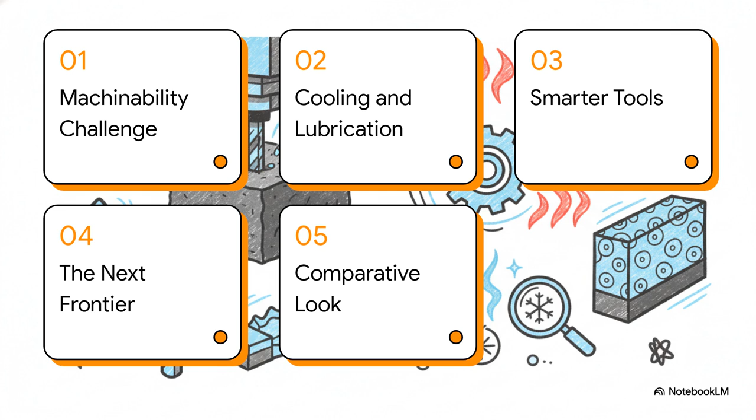All right, let's kick things off with Section 1, the Machinability Challenge. Because before we can get into any of the really cool solutions, we need to have a solid grasp on the fundamental problem we're trying to solve here. This really is the million-dollar question, isn't it? The materials used in aerospace or in high-performance engines are designed to be incredibly strong and heat-resistant, which is awesome for their final application, but it makes them an absolute nightmare to machine.

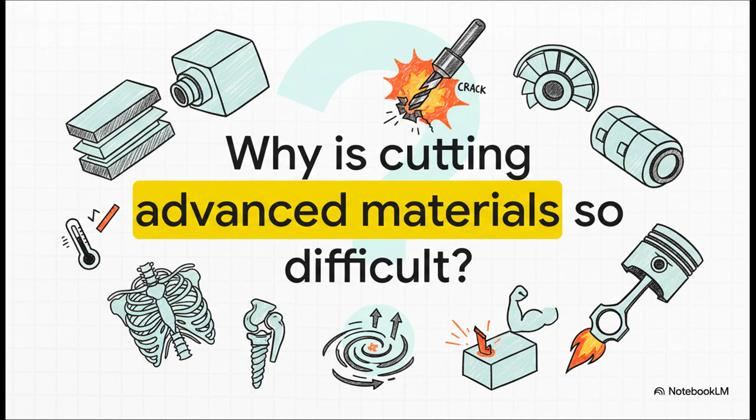They don't just sit there, they fight back, generating just immense heat and pressure that can literally destroy a cutting tool in seconds. And that brings us to this core concept of machinability. It's not just about if you can cut a material, but how easily and how well you can do it. The best way to think of it is like a scorecard with three main criteria.

First, tool wear. How long does your cutting tool actually survive? Second, surface quality. How smooth and perfect is the final part? And third, energy consumption. How much power did you have to pump in to get the job done? These three metrics, they're the key to everything we're about to talk about.

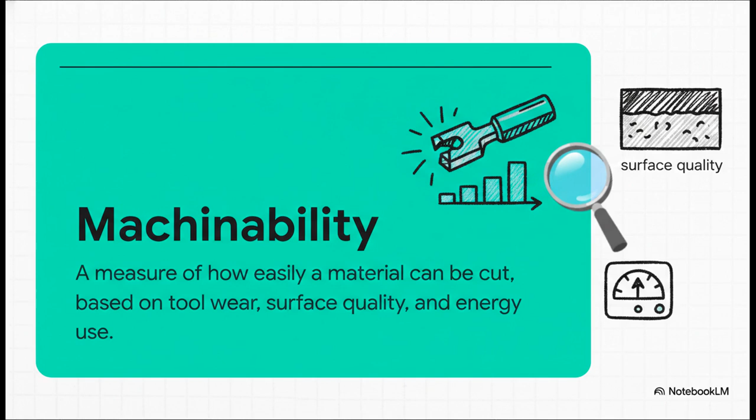You see, the number one enemy in all of this, it's heat. So figuring out how to manage the insane temperatures and the intense friction right at the cutting point is really the first and most fundamental strategy for improving machinability.

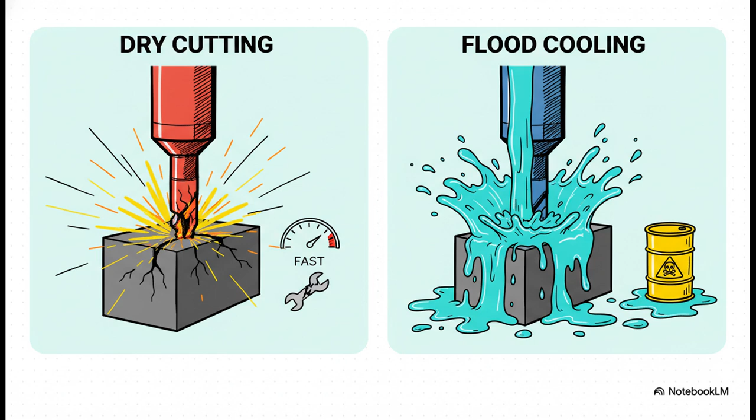For a long time, you basically had two choices. You could cut dry, which is clean and simple, but you generate so much heat that your tools wear out incredibly fast. Or you could go with flood cooling, basically drenching the entire operation in liquid coolant. Now this works, but it's messy, it's expensive, and it creates a whole lot of chemical waste. So yeah, neither one is exactly a perfect solution.

And this is what led engineers to a much, much smarter approach called minimum quantity lubrication, or MQL. Like the name suggests, instead of flooding the area, MQL uses a high-pressure mist of oil and air. It's like a super precise aerosol aimed directly at the cutting edge. This gives you targeted cooling and lubrication right where it counts, but with up to 99% less fluid than flood cooling. It's a real game changer.

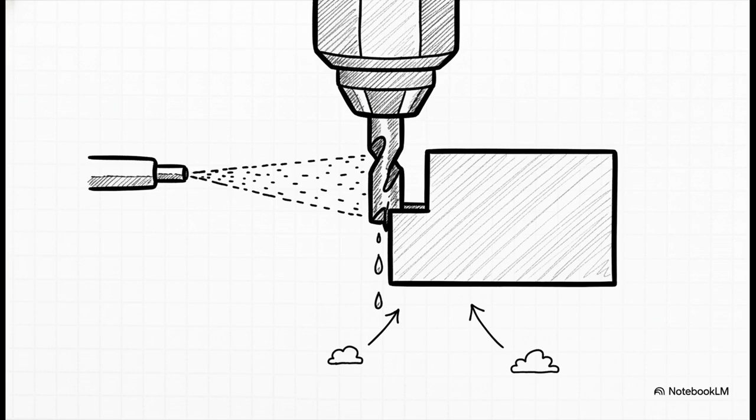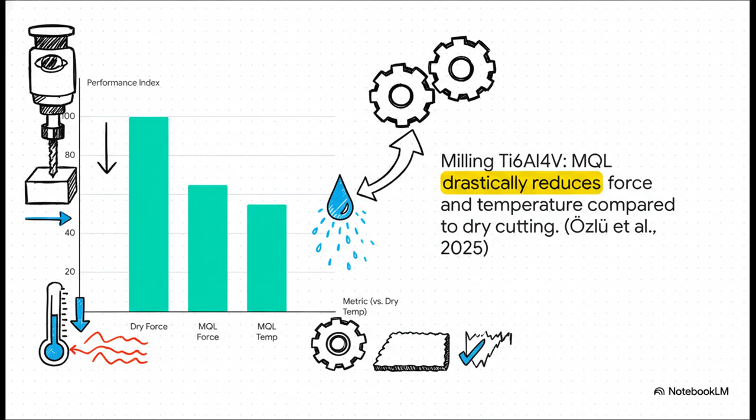And wow, this chart really shows you just how effective it is. If you look at the data from a study on milling titanium, you can see the results of dry cutting over there on the left. Now, watch what happens when you switch to MQL. Boom, both the cutting force and the temperature just plummet. Lower force and less heat translate directly to longer tool life and a better quality part. It's a huge step forward in both performance and sustainability.

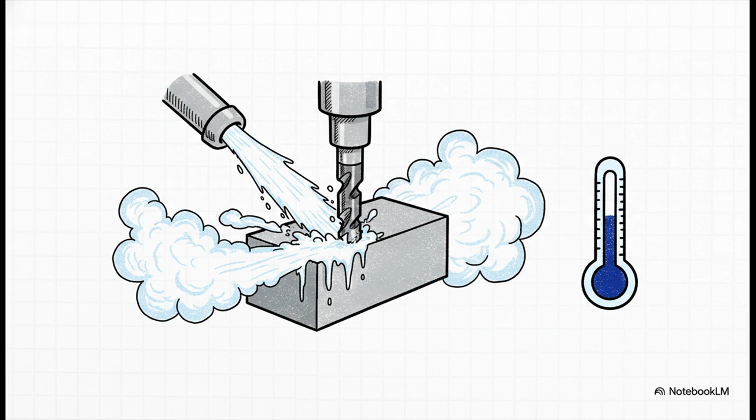But what if we need to get even colder? Well, that's the whole idea behind cryogenic cooling. This technique uses liquid nitrogen at a ridiculously cold minus 196 degrees Celsius to supercool the cutting zone. And the best part? The liquid nitrogen just evaporates into harmless nitrogen gas, which already makes up 78% of the air we breathe. So it's not just effective, it's incredibly clean.

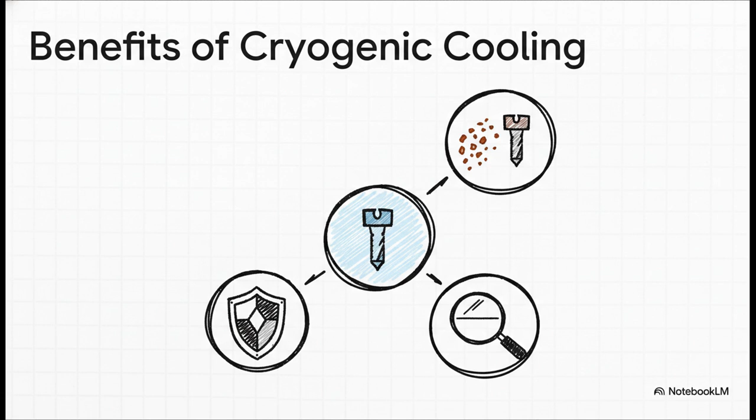But here's the cool part. Literally, the benefits go way beyond just chilling things down. The extreme cold actually hardens the tool, which makes it more durable. It also stops harmful chemical reactions right at the cutting edge, like oxidation, which is basically a high-temperature rust that wrecks the tool. The end result, as you can see, is a much happier tool and a much better final product.

All right, so we've covered controlling the environment around the cut. Now let's zoom in on the tool itself and see how some really clever engineering at the microscopic level can make a massive difference. This is a fascinating strategy. You can actually engineer the tool's surface by etching these microscopic patterns, like little dimples or grooves, right onto the cutting face. And this gives us three key benefits.

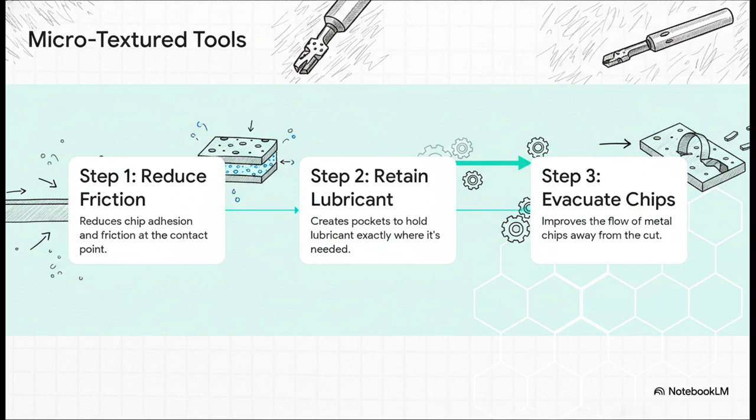First, as you see in step 1, it reduces the surface area that's in contact, which means less friction. For step 2, these tiny pockets act like little reservoirs, holding lubricant exactly where you need it most. And finally, step 3, they actually help guide the metal chips away from the cut more efficiently. It's brilliant. And the results really do speak for themselves.

A 2023 study found that when you combine this microtexturing with a tool coating, you can slash cutting forces by up to, wait for it, 25%. I mean, that's a huge gain in efficiency, all thanks to some carefully designed tiny grooves.

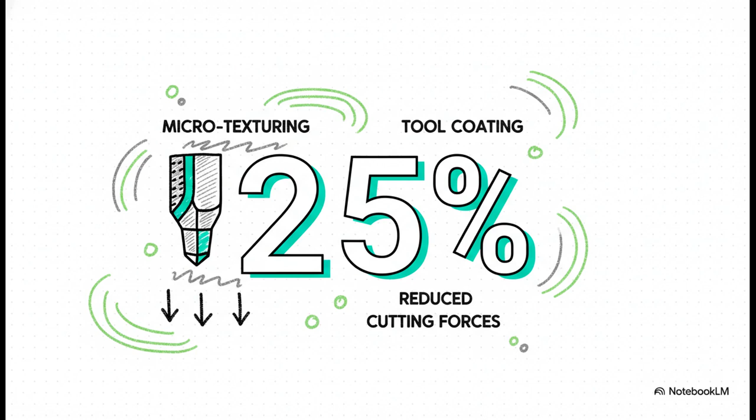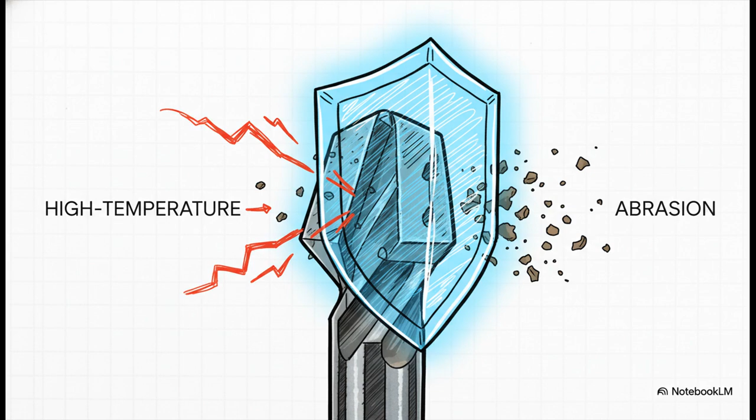Which brings us to coatings. Think of these like a microscopic suit of armor for the tool. Using a process called physical vapor deposition, engineers can bond an ultra-thin, ultra-hard ceramic layer, like titanium aluminum nitride, directly to the tool's surface. This shield is what protects the tool from all that intense heat and the physical abrasion of the cut.

Okay, now we're getting to the really innovative stuff. The next frontier isn't about picking just one of these strategies, it's about combining them. And when you start merging these techniques, you can get this incredible synergistic effect, where the combined result is way, way better than the sum of its parts. So let's take a look at a hybrid approach called cryo-MQL, or CMQL for short. It's a beautiful idea, really.

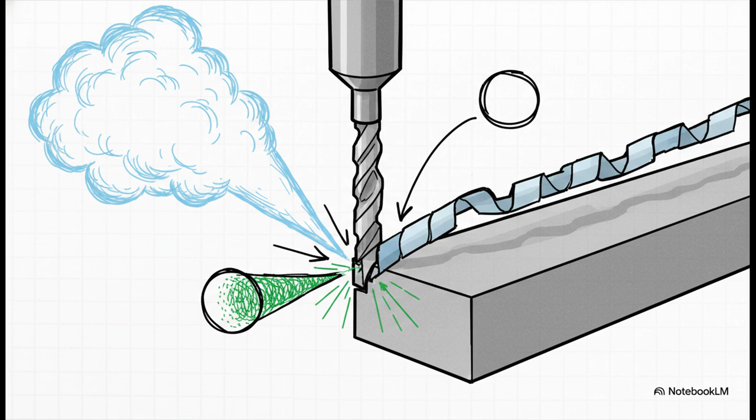You get the immense cooling power from the liquid nitrogen, and at the exact same time, you're getting that pinpoint lubrication from the MQL mist. This combination just flat out outperforms either method used alone. It's the best of both worlds, superior cooling and superior lubrication. But wait, we can push this even further.

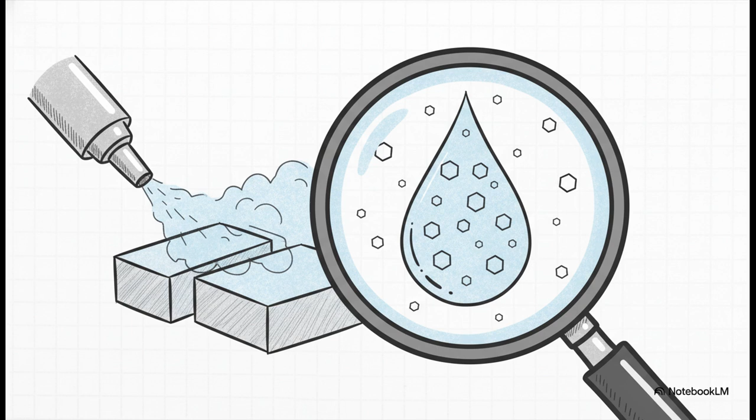Scientists are now adding nanoparticles, like tiny flakes of graphene, into the MQL fluid. These things are so unbelievably small, they can get into every single microscopic imperfection on the surfaces. And the impact of these little particles is just profound. As the research shows, they act like microscopic ball bearings, creating this rolling effect between the tool and the metal chip that dramatically reduces friction.

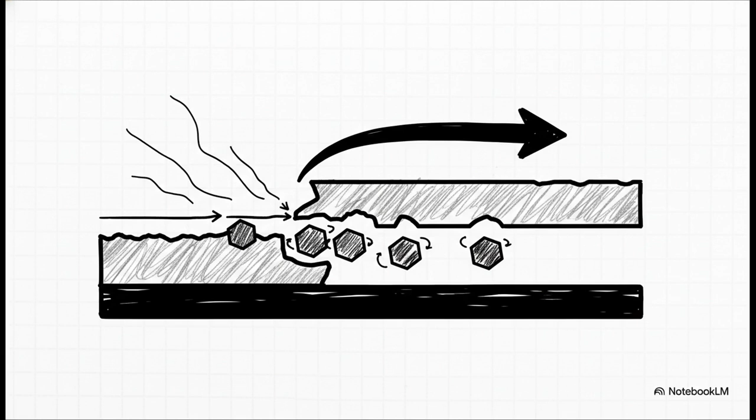They also help the fluid pull heat away more effectively. So what do you get? Lower cutting forces, less tool wear, and a much, much smoother surface.

Finally, let's look at something completely different. Imagine a microscopic jackhammer. That's basically what ultrasonic elliptical vibration cutting is. The tool vibrates tens of thousands of times per second in this tiny little elliptical pattern. This means the tool is only intermittently in contact with the material. It's basically tapping it instead of constantly pushing. And as researchers found, this dramatically reduces the average cutting force and temperature.

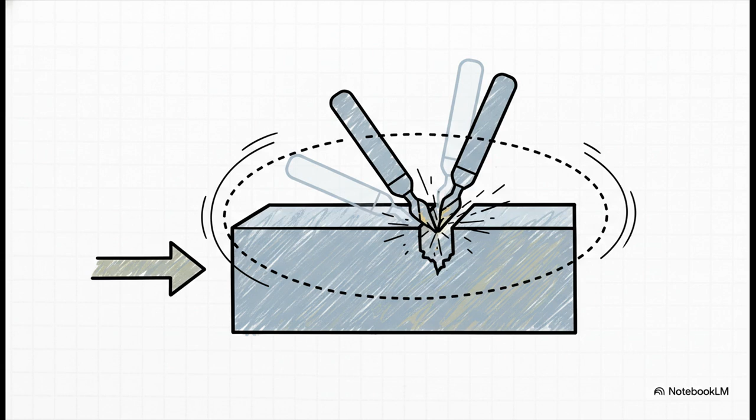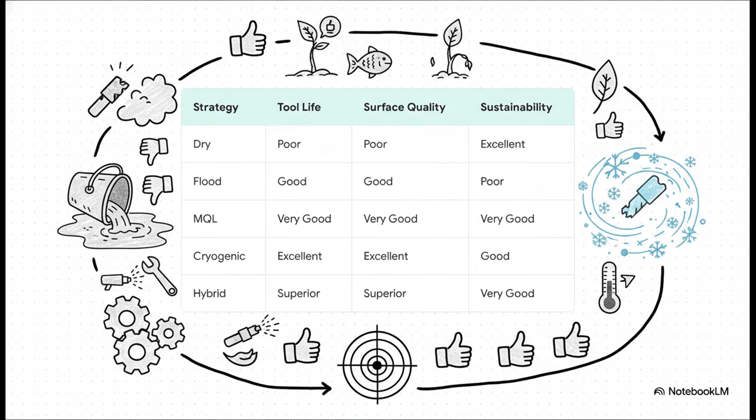Then you get to the modern techniques. MQL is a fantastic all-rounder, a great balance. Cryogenic is a beast for performance. And right there at the bottom, you have the hybrid techniques. They offer absolutely superior performance while still being very sustainable. They're pretty much the current state of the art.

And all of this brings us to one final, really important question for the future. As our materials get stronger, lighter, and more durable, how will our methods for shaping them manage to keep pace? This ongoing race between material science and manufacturing science is what will define the future of everything from aerospace to medicine. The innovations we've explored today, they're just the beginning of that race.